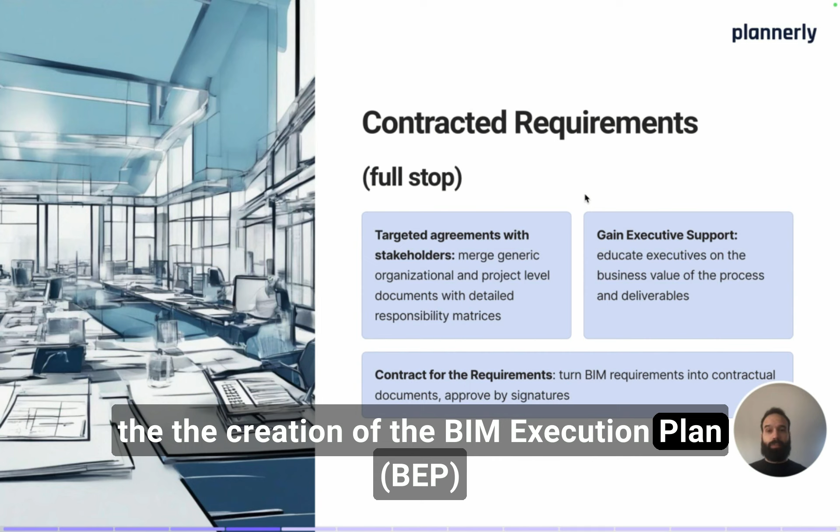You want to invite them into a visual environment that helps them understand what we are doing and why we are doing it. We are talking about complex processes, but visualize it and make it easily understandable for all the stakeholders, regardless of their skill set.

So first of all, let's define the main stages. Let it be early design, pre-construction, construction, handover, facilities management, whatever stage we are at, we are going to manage information. And we have to identify what these stages, purposes and use cases are, because for each and every stage, we might need different information.

We have to plan the components. If we talk about building information modeling, of course, we immediately visualize models. And models are broken down into components, so we have to understand what components we are expecting, but not only modeling elements, but also what are those deliverables, what are those tasks that we have to take care of, and we have to put it into our plans.

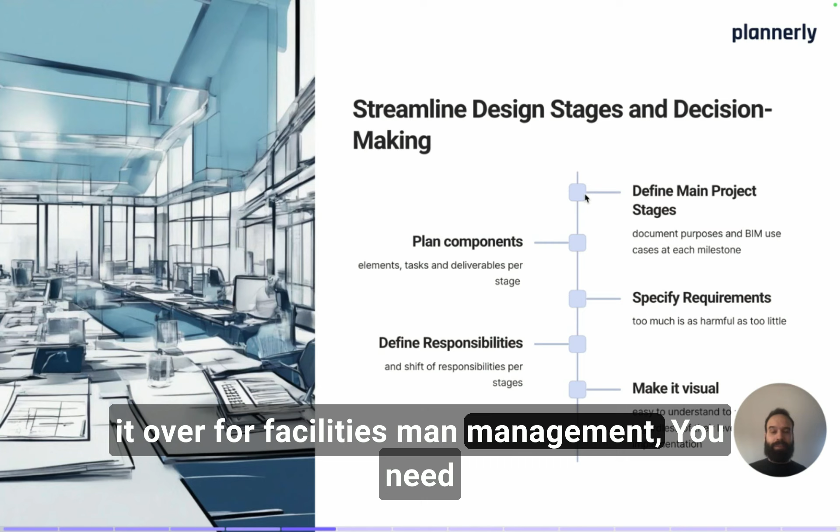Once we have these two main components, the stages and our plan of deliverables, we have to specify the requirements. For each and every stage, we might need the same components in a different way. If you are doing a quantification, cost calculations or a coordination, you need different information. If you are doing field layout or handing it over for facilities management, you need different information, and you have to communicate that. And make sure that you are not requesting too much, because too much is as bad as too little.

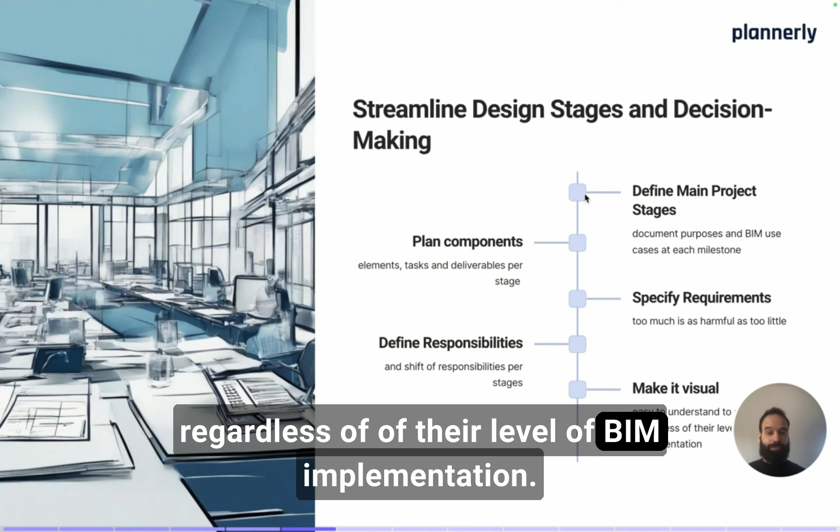And then make it visual, make it easy to understand for each and every project stakeholder, regardless of their level of BIM implementation, even those who are decision makers, to your executives who are not necessarily working with BIM on a daily basis. Once we get here, then we have a plan in place. Let's create contracts, let's sign using electronic signatures to have targeted documents and targeted agreements with each and every team. But then let's jump into the execution.

When it comes to creation of collaborative agreements, again, the main focus is not to have a long document, which is a copy and paste of other documents, but to really have targeted agreements with your teams, making sure that you are breaking down this unstructured data into easy to understand and easy to manage document sections. And you can release these document sections as they become available. As soon as these documents become available, you can invite your collaborators.

They can give you feedback, which means that we fully understand why we are doing BIM and how we are going to reach our targets on a given project. The involvement of the teams and having these approval workflows and having the approval from each and every team would also mean that the buy-in into this project execution is much, much, much higher. Therefore, the plan is going to be followed. Make it dynamic, make it available for each and every team member on your project at any point in time.

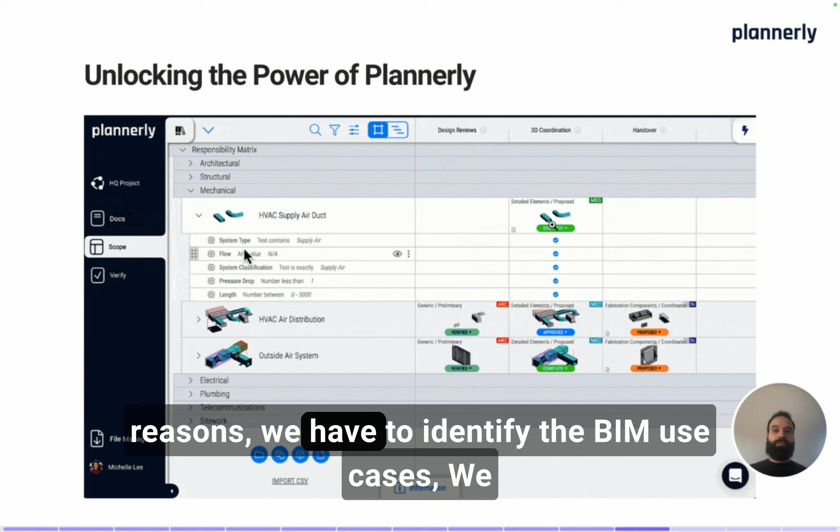When it comes to understanding who is doing what at a certain point in time, the right BIM at the right time by the right people for the right reasons, we have to identify the BIM use cases, we have to identify the components and deliverables, and in this matrix, we can easily communicate and visually communicate what is requested from the teams. We can also communicate who is responsible for the deliverables at a certain point in time.

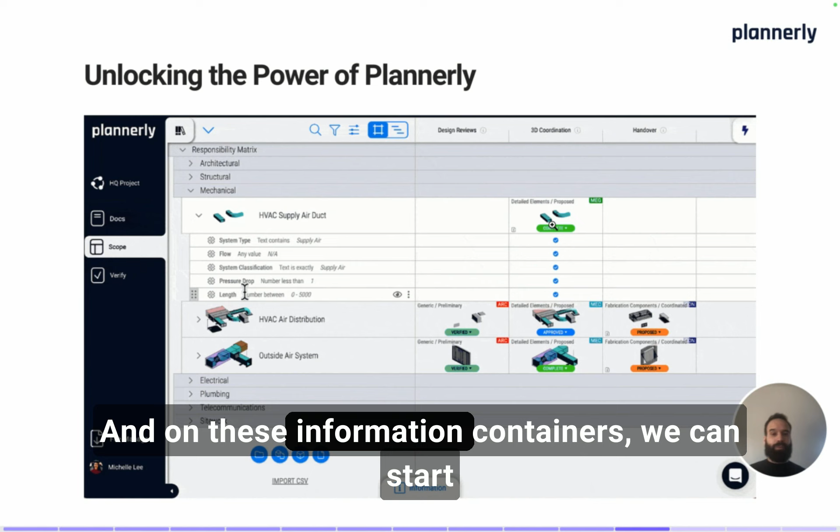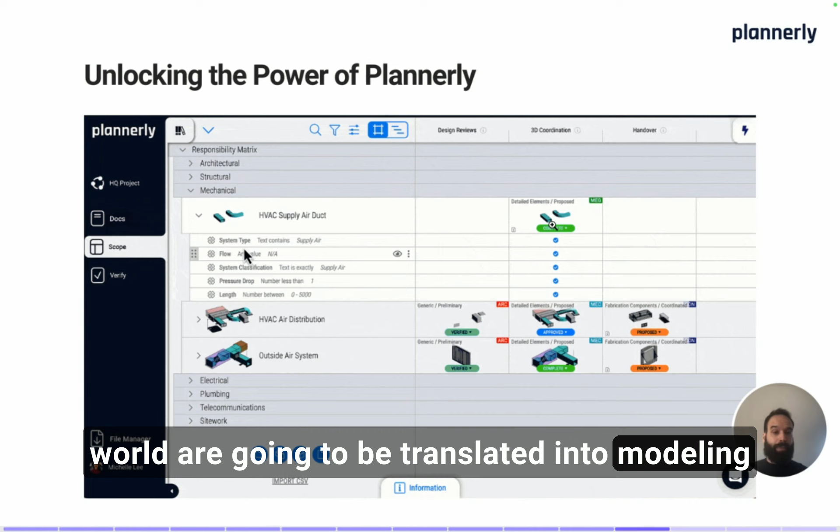And on these information containers, we can start discussing, of course, geometry, because that's a topic, but also information requirements. So information requirements, which eventually in our BIM world are going to be translated into modeling properties, that's something to be communicated and easily understood in a visual interface. Again, helping also your executives understanding what we are doing, how we are doing that, and why we are doing that.

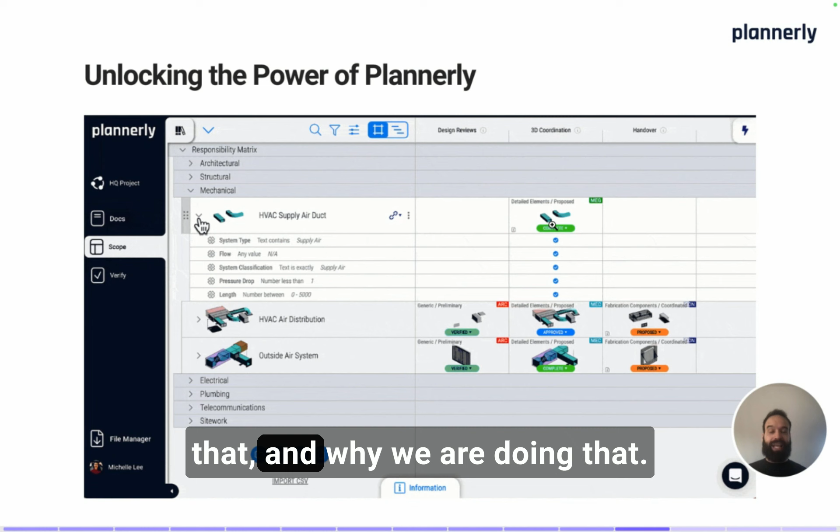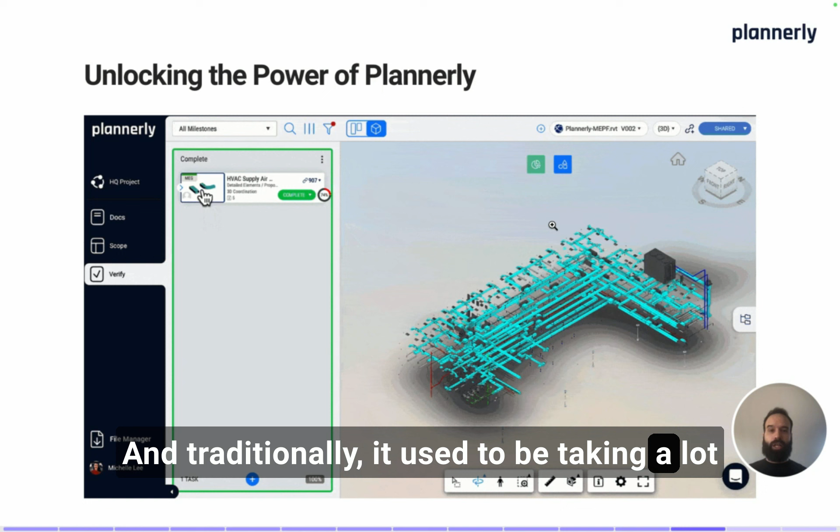Receiving models is a beautiful thing. It means that we have progress on the project, but are those models aligned with your plan? That's a big question. And traditionally, it used to be taking a lot of time to check in any kind of application, setting up rule sets, setting up filters to understand that the model created meets the requirements. Now we can automate it and make it autonomous.

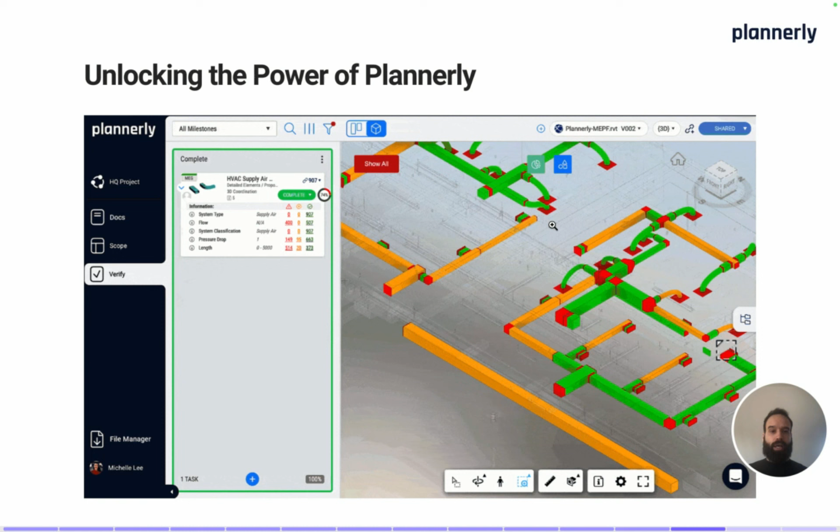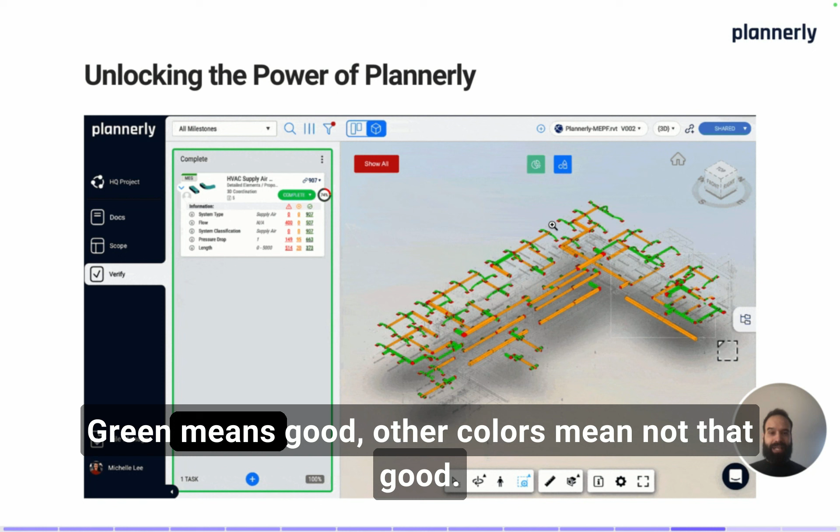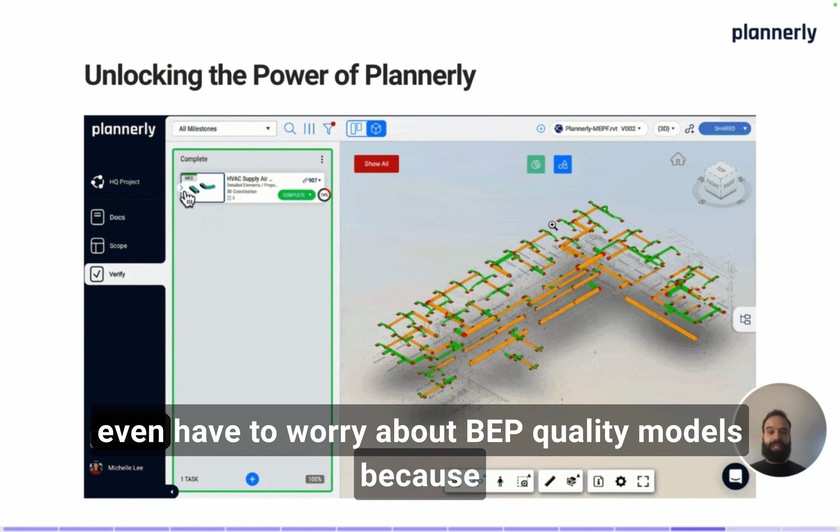Automated model checking means that the models can automatically be checked against the contractual requirements, and with a very simple visual feedback, you would understand if they meet the requirements or not. Green means good, other colors mean not that good. But you can make it autonomous as well. So giving this same technology to your suppliers, they can perform the quality check. So you as the receiving BIM manager, you wouldn't even have to worry about bad quality models because it is already passing a number of automated checks before the model gets to you.

Let's talk about ISO 19650 for a second as well. A beautiful standard released a couple of years ago that will help us AEC professionals to work in the same direction. Implementing the standard might be a little bit overwhelming sometimes, so what we are also doing is making sure that if you are using Plannerly, you can stay aligned with the standard in a simplified way.